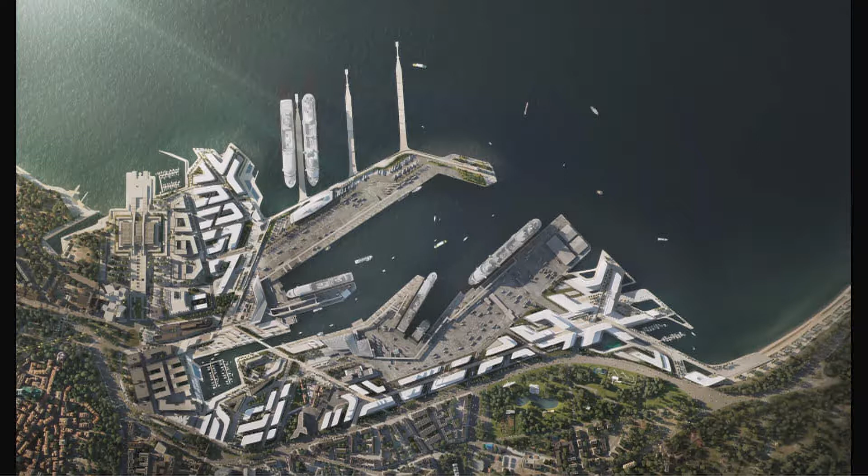We had a team of different people: Rain, Liz, Sulo, Peter, Janne, Alexander, and Jak. And we tried to really engage on a lot of different specific interests that everyone put on the table.

So obviously we had a brief that was taking on board some of the guidelines from two different visions, the Main Street and the waterfront vision documents, and tried to integrate that with the Streamcity vision, which is our vision for the master plan of the port area.

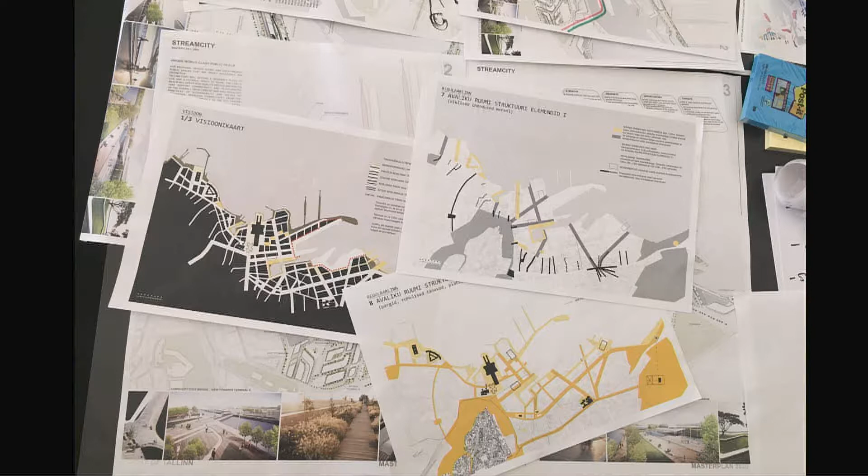Those are the documents, they're actually laying still on the table the same way, so it's our proposal and the other two documents, one on top of the other. I think there's been quality in all of them, but also there's still a lot of things in progress in all of these documents.

So it was quite fun to see what we could take on board in a very straightforward way. Once again, we were very practical.

So we looked into the green corridors and the connection to the cultural kilometre. How do we activate certain areas, the north portion of the site, across the site, and the new green corridors, which is actually one of the topics of the overall planning master plan.

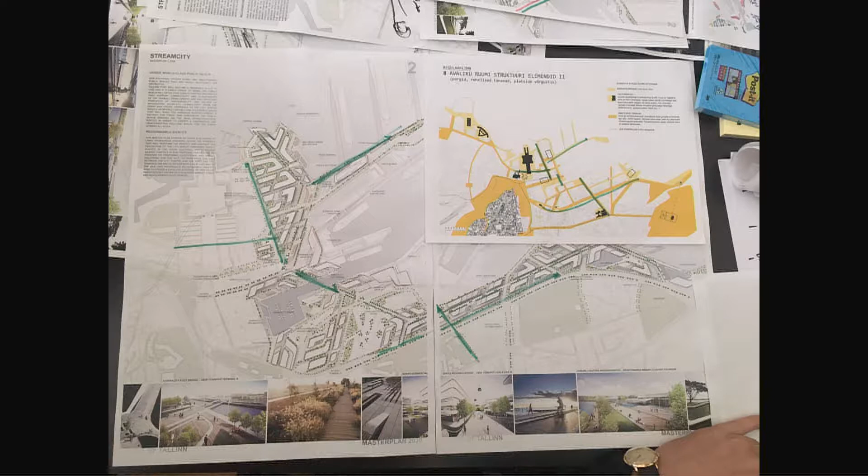So again, we tried to mark up on one of the two vision documents and bring it back to the third one. You could actually see that some of the lines are already somehow talking to one another. And those are the things that, in a practical way, we could start implementing because they're coming from different sources. That definitely means there is a certain value to the way they've been approached and studied.

Another interesting thing was the accessibility and urban connection. There are critical areas, Terminal A location. There was an interest about the idea of moving the terminal slightly towards the north to free some of the view corridors from the old tower, let's say, and the old pier.

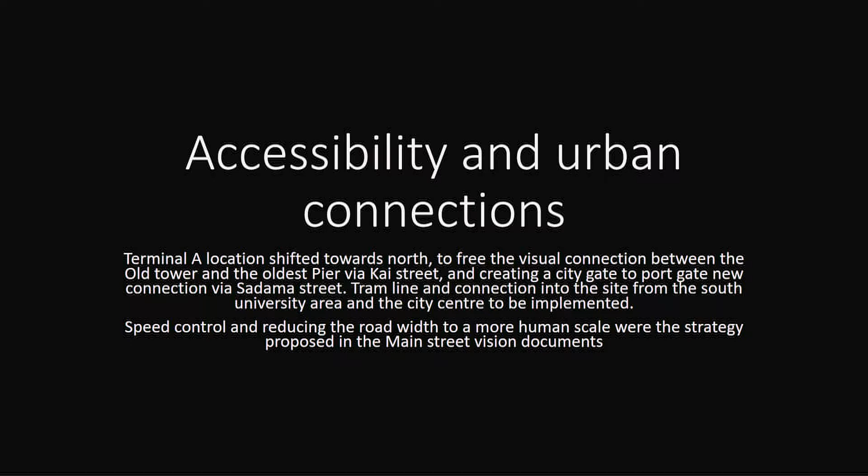So what was interesting is that we want to create a gate-to-gate connection, coming from Terminal A to the gate to the old city, but also a visual connection from the old pier to Kai Street. That's kind of linking back to the historical idea that Sadama Street was linking back the city to the Harbour area. That was one of the main things we literally tried to agree on.

And we found a lot of agreement in the end. So it's interesting because if you ask us, we're going to have a lot of solutions already in place. They might all change, but I think the team had a lot of fun actually agreeing and signing off decisions while we were talking about it.

And obviously we had other interesting inputs from the other documents, the connection to the university area, how we could bring in and change the program that we planned in our document by listening to the vision document that was actually highlighting the connection to universities, a different type of users.

At the same time putting together the tramline connections. And again, because we're the practical team, we know already that there is a certain approved scheme and a certain budget for it, so we're going to have to find the money to get the extension to the north part, because we know there is a limitation on what has already been planned.

We got transported into thinking about the future, and we started thinking how we could bypass some of the problematic issues already on site, and how we could implement new activators, new attractions, or new interpretations of what the space is now.

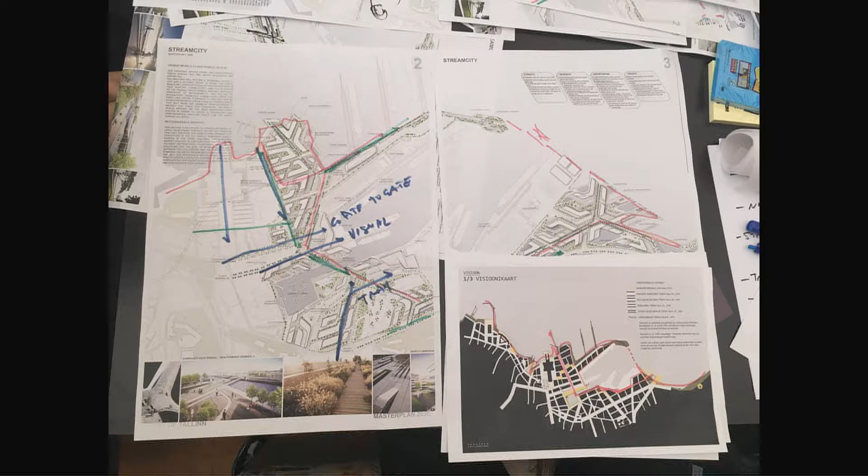We tried analyzing if we could have ferry connections for people to enjoy the water from the sea. At the moment there's a lot of traffic from other countries, from Finland, or from cruise ships, but the local public isn't really enjoying the seaside from the water itself. So it was interesting to think: what if we create a public transportation system using the waterfront that allows people to see the city from the water?

We started sketching what we should connect - an opera house location to a landmark tower, to the existing Linnahall - which becomes something even stronger in the next slide.

There were a few interesting ideas we put on paper. Because we also had people from the Port of Tallinn, we knew some were maybe too unrealistic, others too controversial, but we also got some really good feedback from them.

Another interesting idea was, since we're talking about it, how do we bring the opera house back into the scheme? I know it's been on the table for a lot of years - too many years, I guess. So we started addressing where we could place it.

We found four or five different locations. One towards the east end of the water. Another on the north side, but because we don't have ownership of that land in terms of master planning, we thought maybe we could place it in relationship to the Linnahall.

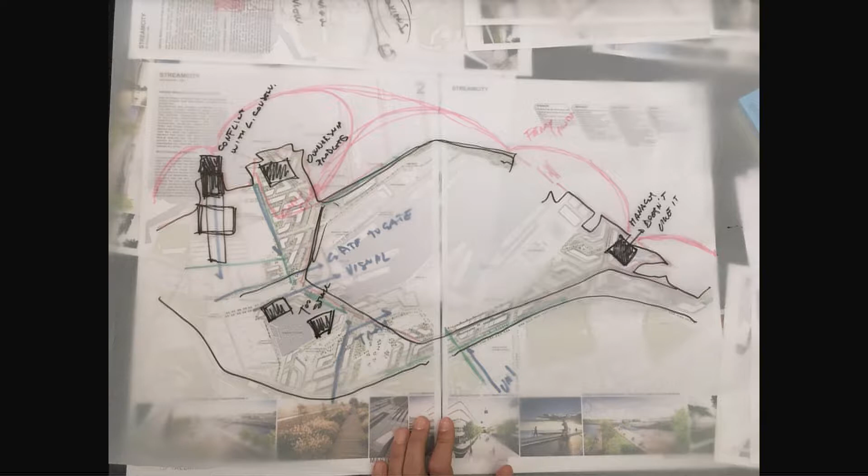Maybe this new opera house element could become something that triggers and helps the renovation of the Linnahall, one of the historical congress halls that has a very strong presence on site.

At a certain point we started thinking, why don't we place it towards the Admiralty Basin? That was something also proposed in another master plan finalist scheme.

Because we're the practical team, we managed to call the manager of the opera house, and he confirmed the dimensions - we know we can probably fit it in the Admiralty Basin. So we could try to create a new landmark on the water that can compete with the functional, more industrial nature of the Admiralty Basin itself.

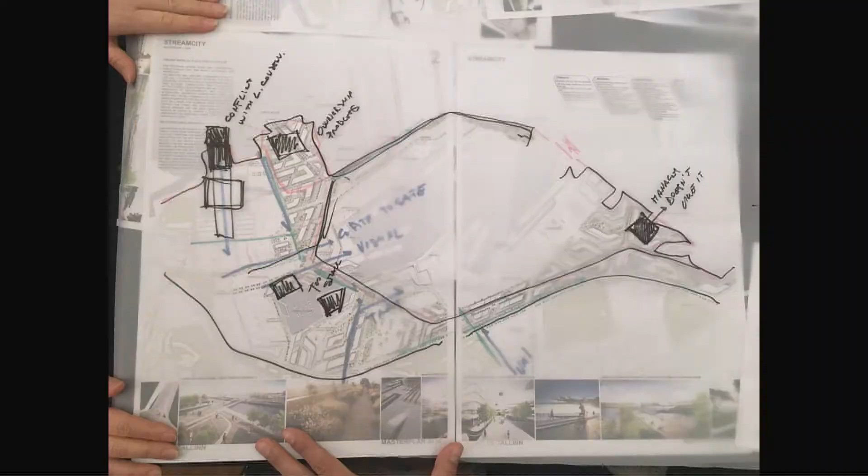That's the proper sketch showing the dimensioning required to fit the opera house into the center of the development - that's what we just went through.

We also started doing some provocations between one another to see how we could bring those ideas into reality in the future.

We started saying, why don't we take all the North Port functions and relocate them somewhere else? That would be ideal. But that was coming more from a real estate or developer point of view, and we didn't get too far with it.

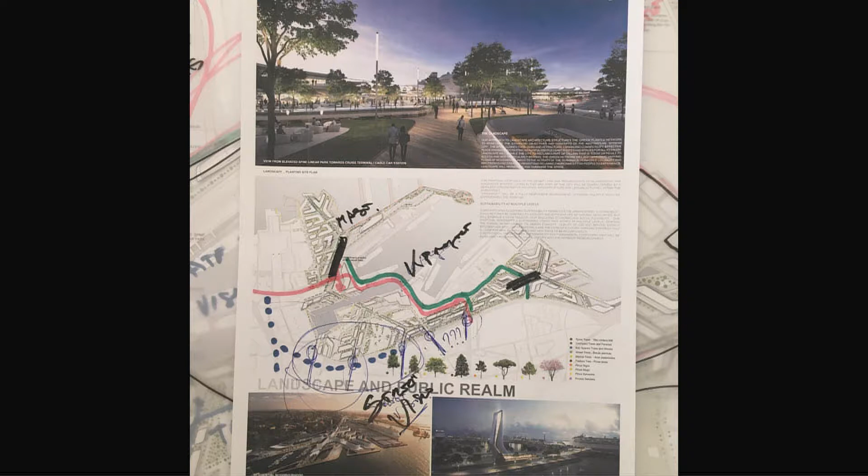We also started thinking, what if we create bridges for cars? Funny enough, that idea came from someone working on the new Rady Street project, which is an interesting development. It was something that can link back to the high street vision.

We can use a mitigation system to slow down traffic on Artery Street, and then bring that approach to the other two crossings that will be part of the new Rady Street, feeding the city back into the area instead of only highlighting the longitudinal direction.

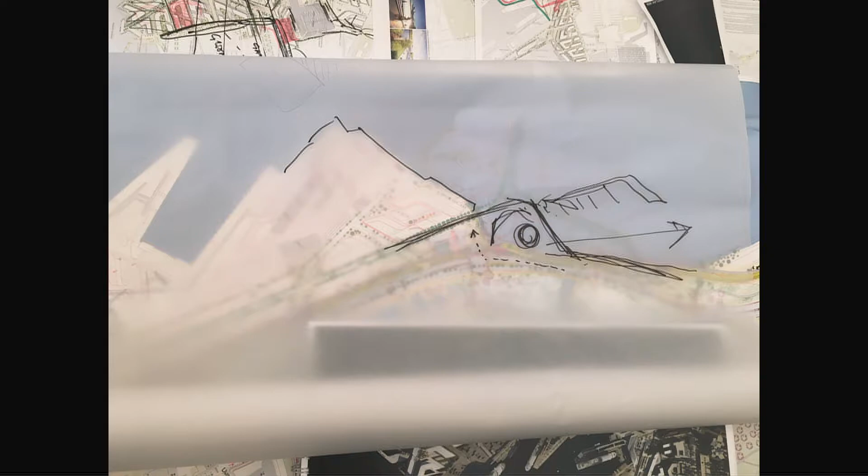Another item, quite technical, was coming mainly from the city planning point of view: how we can create an extension that is not conflicting with the waterfront promenade, and how we can create a fourth phase of expansion towards the water while preserving the water park on the east side of the city. This was a fairly technical solution - there's a basic car entrance and a straightforward outline of what we can and cannot build. That was interesting because it's a direct answer to a straightforward problem.

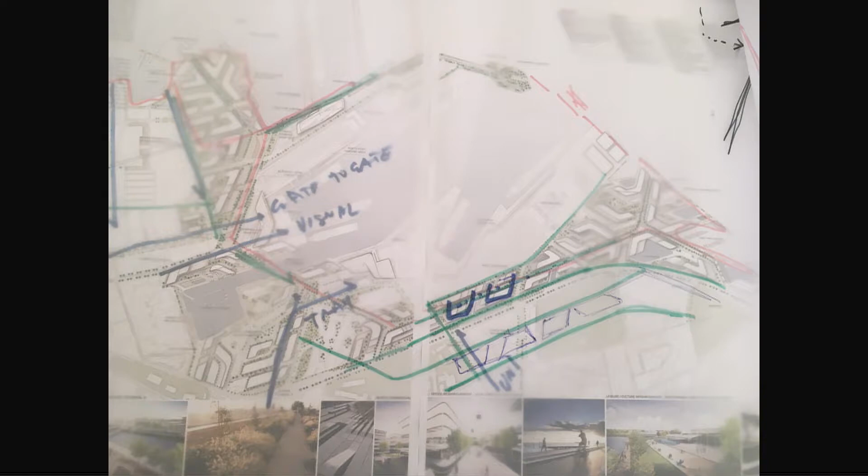One of the last items was the typology studies. We started sketching which scale we're using and addressing in our first sketch for possible building typologies. We noticed there's a very strong directionality going from west to east, given by the urban configuration of the new Rady Street, but also by our idea of having a parallel pedestrian line crossing and cutting the building.

Now what we're thinking is: what if we address it with courtyard typologies versus linear typologies? What if the pedestrian road, which sits between the two functional traffic flows, becomes a courtyard typology that's cut through and punctured by a lively pedestrian streetscape idea? These are studies on alignment and crossing between different flows and volumes - just a first sketch, but something we could implement at a later stage when we start addressing the real typology of buildings and streetscape.

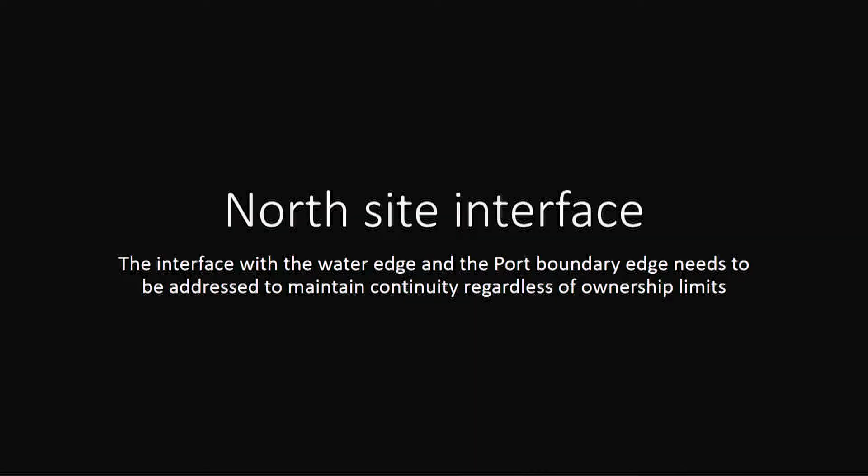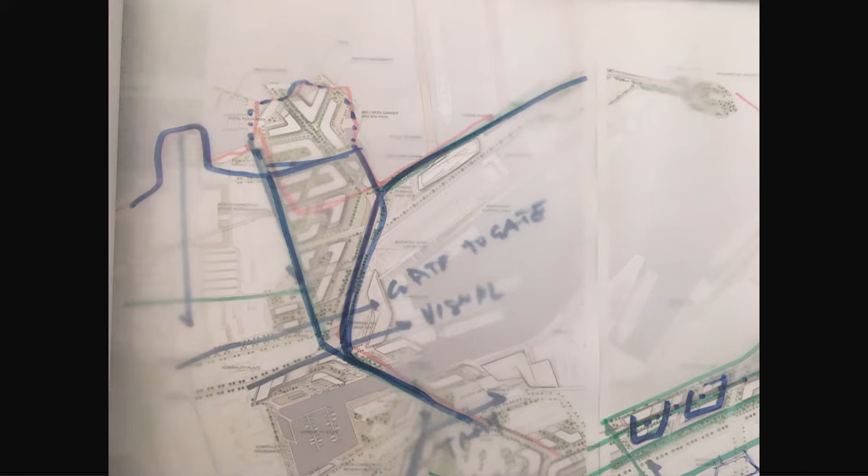Then the north site interface - obviously for us, we tried to convince the port to buy the north plot because we think it's quite important, but we didn't get too far with it. Still, what was interesting was that we could preserve the idea of connecting the edge of the waterfront, even by bypassing the north limitation of the site boundaries, and connect it back to the promenade linking to the landmark at the end of the breakwater edge. This is still something we need to readapt based on our first concept, but it can be integrated at this stage with both the vision of the seafront and our Streamcity vision master plan.

Then there's something related to the branding. The phase one identity was something we tried to name in our report, but it didn't really convince us. I think the problem is it was a generic title - we called it 'the city to the waterfront,' but we think it should be something more concentrated on the public activities and public realm, especially the basin, as a new center for the city. Those are all items we tried to resolve, and hopefully we'll bring most of them into our next refinement of the project. Thanks.